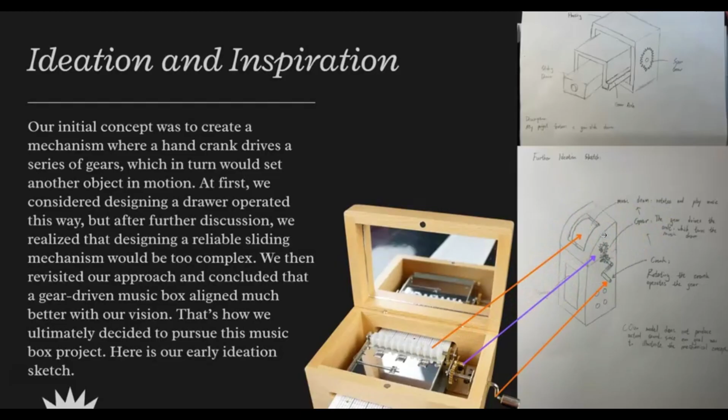And here's the further ideation sketch of our project. You can see the corresponding part in our sketch and in the actual music box we want to build. And here's the task assignment of this project. Jeran is responsible for the main body part, and I am responsible for the mechanical parts of the model, which is rendered in the picture.

And then let me show you the model displayed in the software. And just a heads up, Jeran had some issues with SolidWorks while we made the presentation, so he will be using Onshape for his part of the demo. But all our models were originally built in SolidWorks.

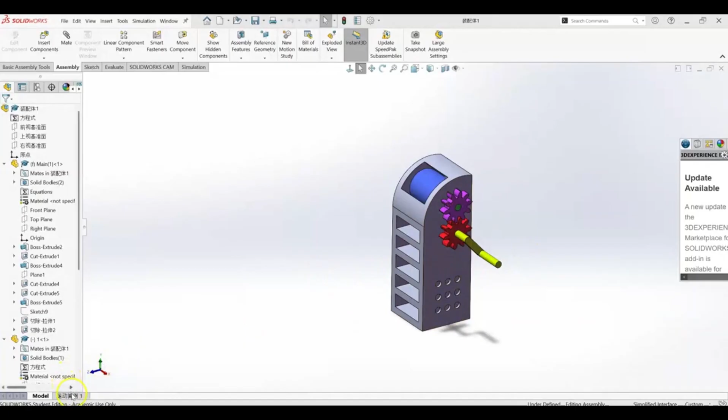So in this video, I want to demonstrate how to use the motion analysis function in SolidWorks. First, you open the motion analysis function and you switch from animation to motion analysis. Then you're supposed to mate the part that you want to apply the motion on. And here, the two gears are already mated. So the next step, I'm going to choose a motor. I want to choose this surface, which is connected to the crank, and apply the component and direction. And set a speed you want.

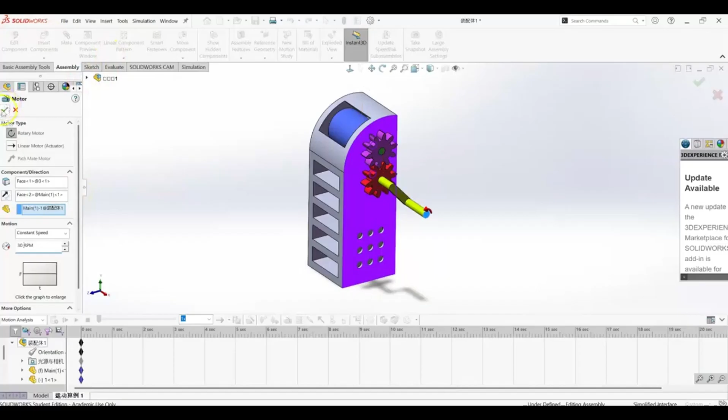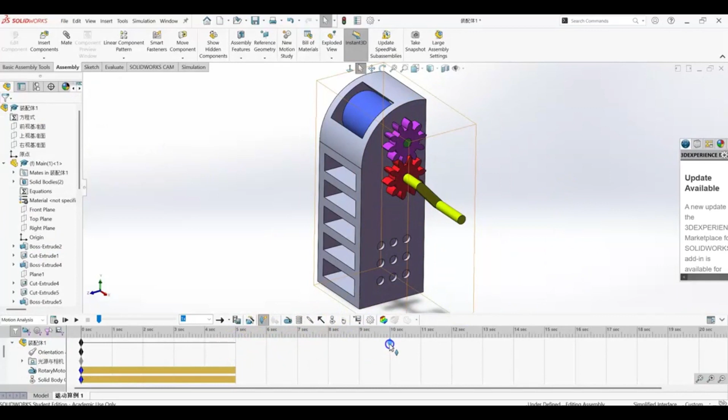The next step, you want to select a contact between the two gears. Make it steel dry and steel greasy as requested. Finally, you switch the timeline to 10 seconds, then it will work.

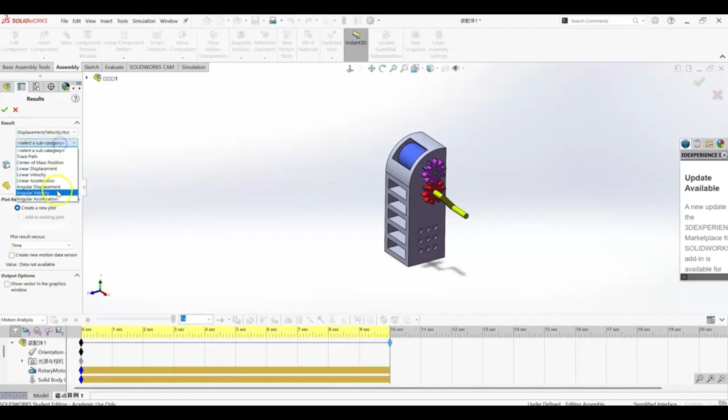You can also check different types of calculation here. You click results and you select the proper category. For example, I'm going to choose the angular velocity here. I select this, and it shows you the angular velocity of this part.

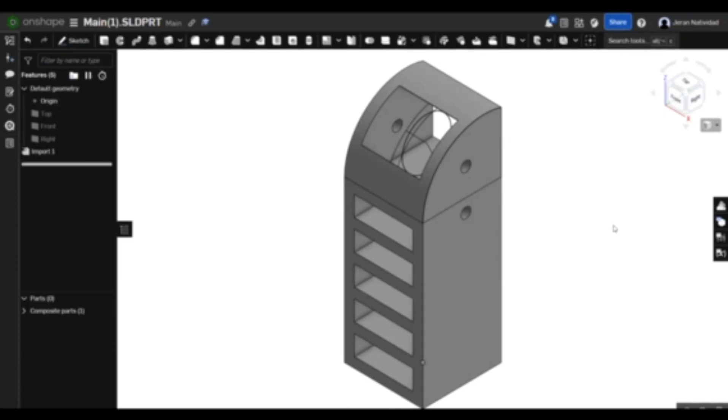Our project was to build a music box that doubles as a storage container. The upper part of the assembly plays music when the handle is cranked, while the lower part of the assembly can be used as storage compartments. During the making of this project, I was responsible for making the main body of the music box, while my teammate handled the gears, handle, and the rotating wheel of the music box.

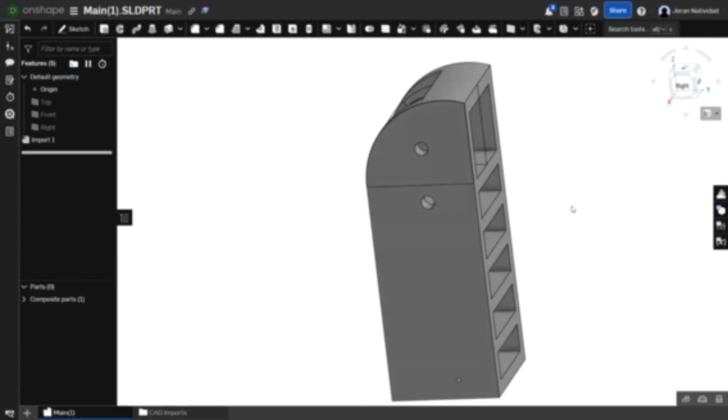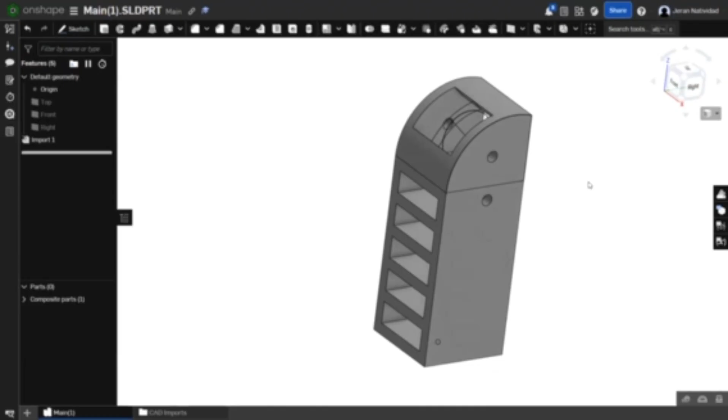The dimensions for the base of the main body measure 40 millimeters by 40 millimeters with a height of 115 millimeters. The top features a curved cylinder with an opening which provides cutouts on the top and back to provide a clearer view of the internal structure while enhancing the overall aesthetics of the design. The lower section is designed as a rectangular part with multiple compartments, making it suitable for storing various items. Holes were engraved to fit the axle, crank, and Lego piece on both sides of the main structure.

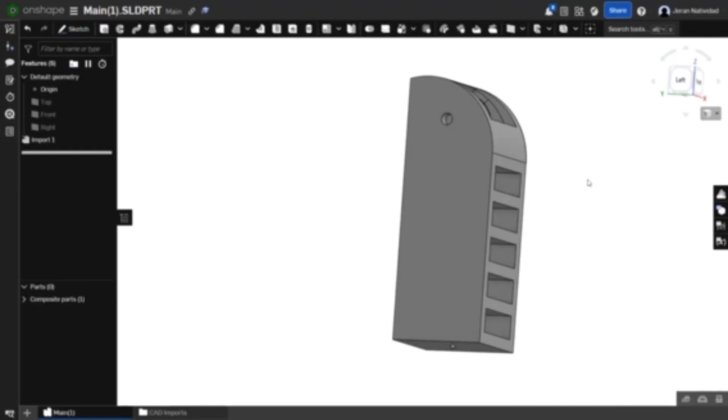Some challenges that I encountered during the design were determining an appropriate size for the top opening to showcase the rotating wheel, and more notably, dealing with dimensional tolerances when designing the holes. My teammate and I repeatedly discussed the axle and Lego dimensions and made several adjustments to ensure the final product fits perfectly.

Hello everyone, my name is Jia Hao, and I'm responsible for the mechanical components of the project. As you can see, the parts I worked on have been rendered in different colors, which are the handles, the gears, the axle, and the blue music cylinder. So let's take a close look at the connection.

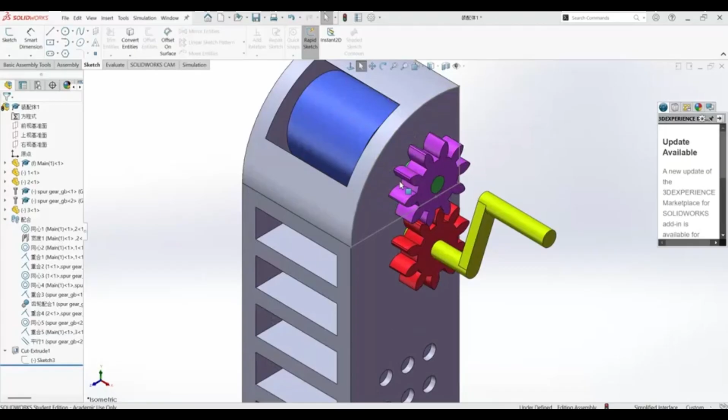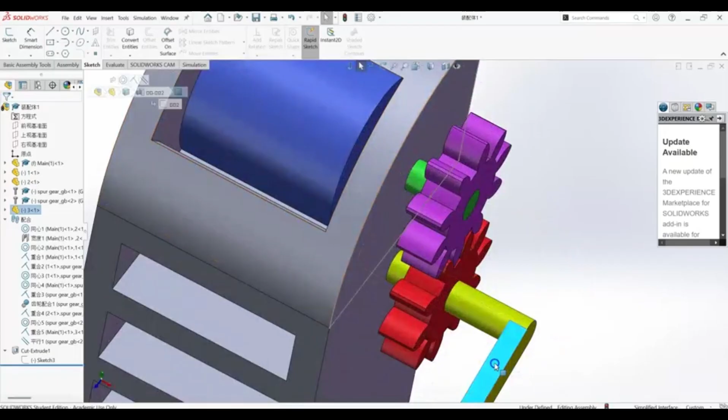In this hand-cranked music box, the components are connected through a series of mechanical mates, as shown here, that define the motion transfer from the handle to the music cylinder, which you can see when I rotate the crank, the blue cylinder is actually moving. So, the handle here is mounted to the driving gear using the concentric mate combined with the lock mate, ensuring that the gear rotates rigidly with the handle without any axial movement.

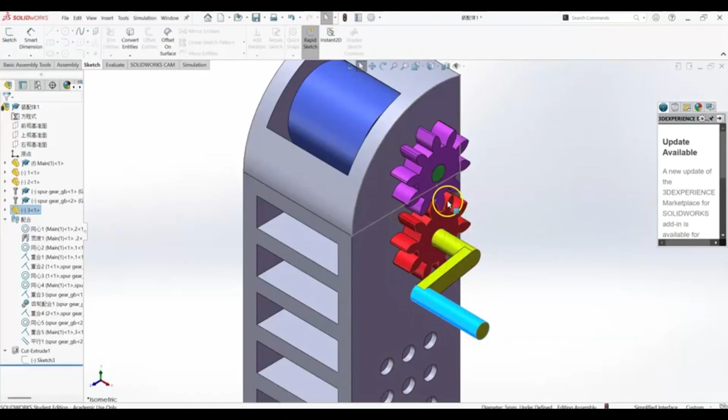And then it's the driving gear and the driven gear. The driving gear engages the driven gear through a gear mate, which establishes the rotation between two gears. And then it's the connection between the driven gear and the axle. The driven gear is connected to the main axle through a concentric mate. Also a lock mate is applied so the gear and the axle rotate as a single rigid body.

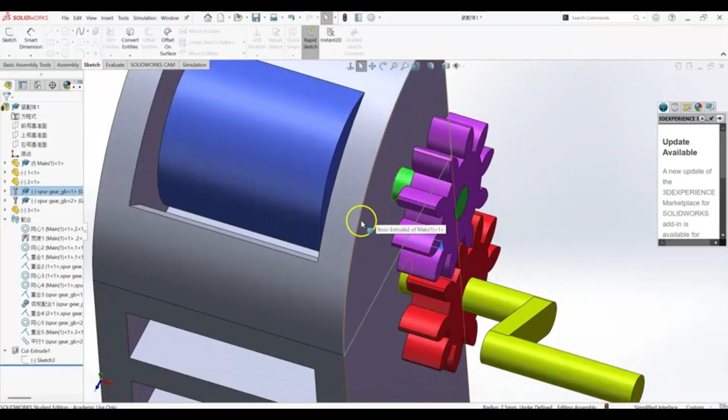The axle itself is supported by the housing using the revolute mate to allow free rotation. Let me show you more clearly. You can see it allows free rotation here. So on the opposite end, the music cylinder is fixed to the axle with another concentric mate and lock mate, ensuring that the cylinder rotates exactly with the axle.

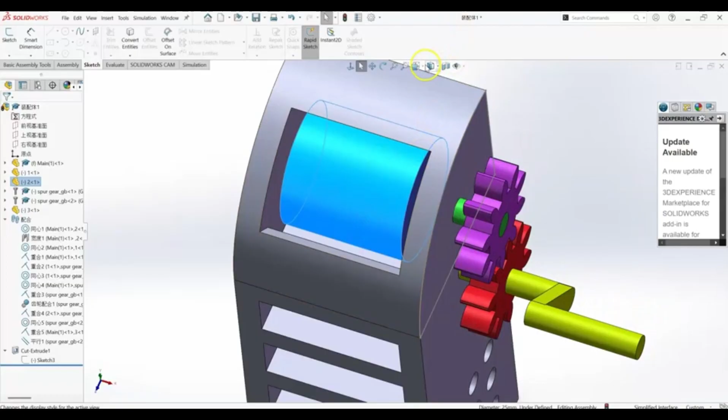And together, oh, I'm sorry, 1 second.

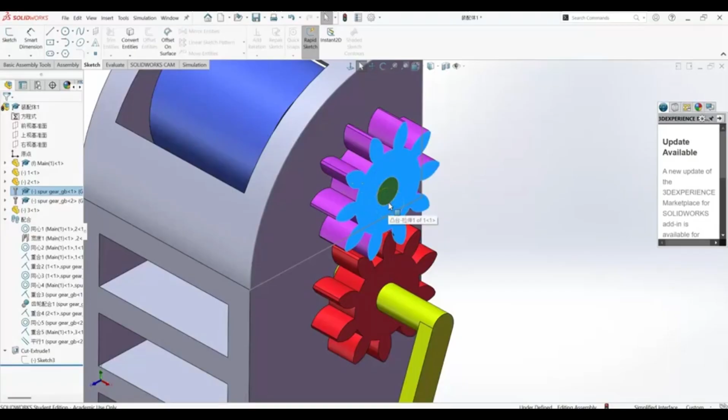Together, these connections create a fully constrained motion chain. So when you turn the handle, it rotates the gear, and the driving gear rotates the driven gear, and the driven gear drives the axle. The movement of the axle drives the movement of the blue cylinder. Let me show you this way. You can see the blue cylinder is actually moving through the green axle in the middle.

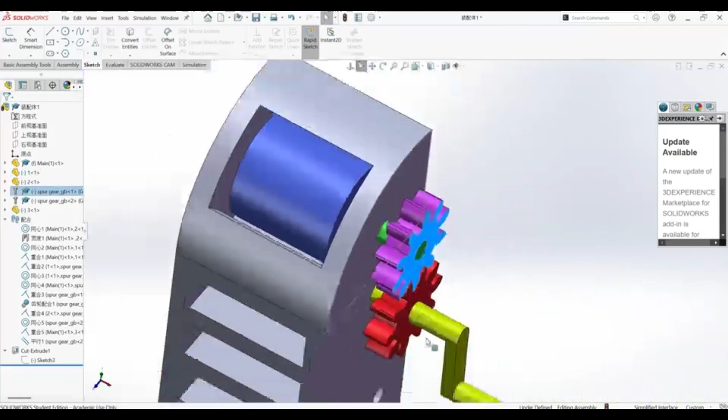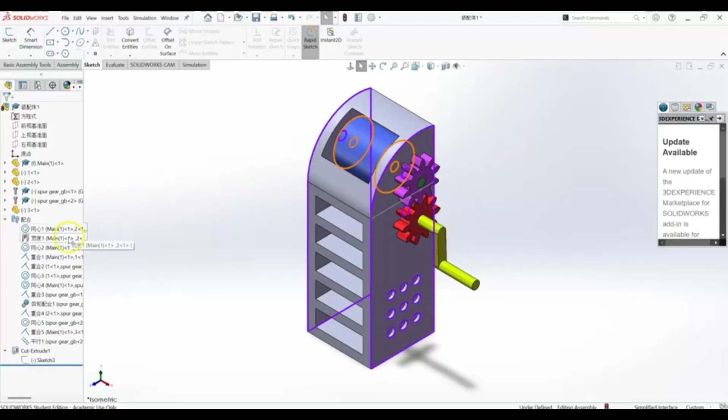And there are some challenges I've encountered while assembling these parts. First, determining the appropriate mechanical connections and constraints between different components is a challenge. I had to decide which kind of joints or mates would allow the model to function smoothly while keeping everything securely in place. So here are the gears in the model. You can see it's a little bit complex, and you have to think of what kind of connection will make it work appropriately. Second, after completing the design, the physical assembly did not operate as smoothly as expected.

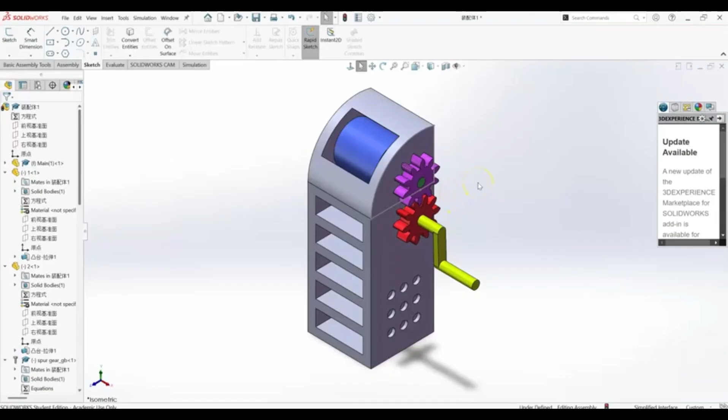To be more specific, there were issues with rotation. So that requires adjusting tolerances and dimensions in the original model. So I discussed with Jaren, and after several rounds of discussion and refining the design, we finally achieved a working prototype. So later on, I will show you the prototype in the printed model.